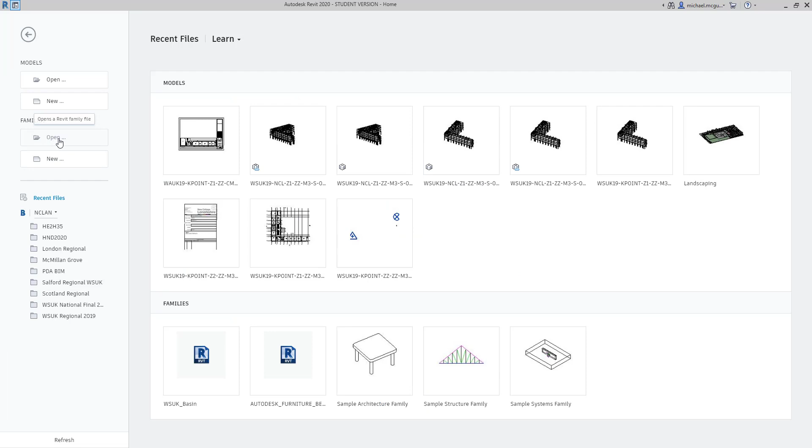If we look at the instructions, add the components below and then edit those families. Either way, whether we edit them or add them in first, doesn't really make much difference, but the task here is really just how to edit them. So within Revit, if we look at the families section and say open, I know I need to go to downloads, so we'll start off with the wall mounted family that's there and just say open to that.

So what we're being asked to do is edit the family so that its location will be calculated in the room. So if we look at the reference level within floor plans, if we go to reference level view, and we can scroll down.

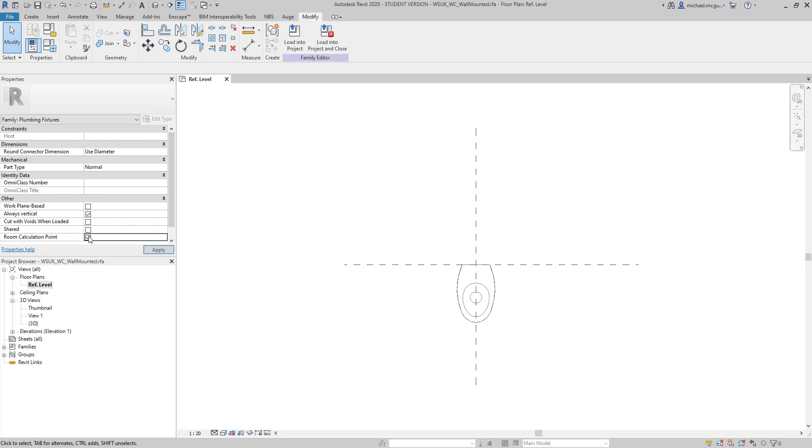If we click in the view itself, we've got room calculation point. So we switch that on and we'll see the symbol of where the family is going to be counted whenever we schedule, which room is this likely to be in. Wherever this little marker sits, it's going to use that room.

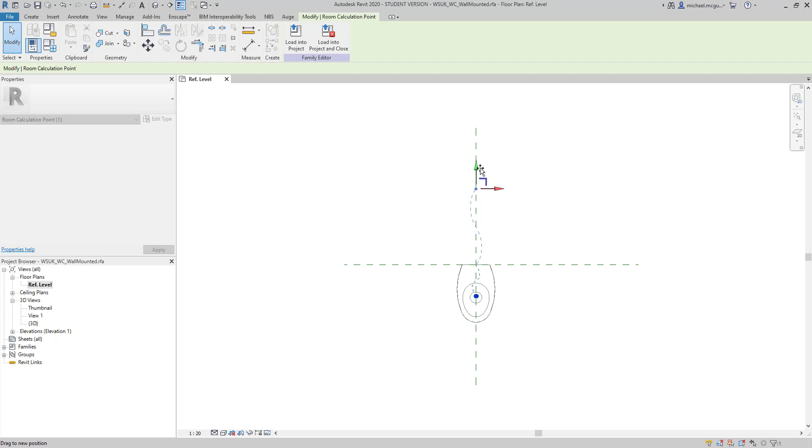So if I use tab a little and just bring that into here, then it's definitely part of the family, which is sitting in the room that it should be calculated in. And if it were to sit up here, for example, and there's a wall here, and behind this space, say this is a room and it is a bathroom, behind that there's maybe a chase for the vertical pipes or something, or a different room, then it would be calculated as part of that room.

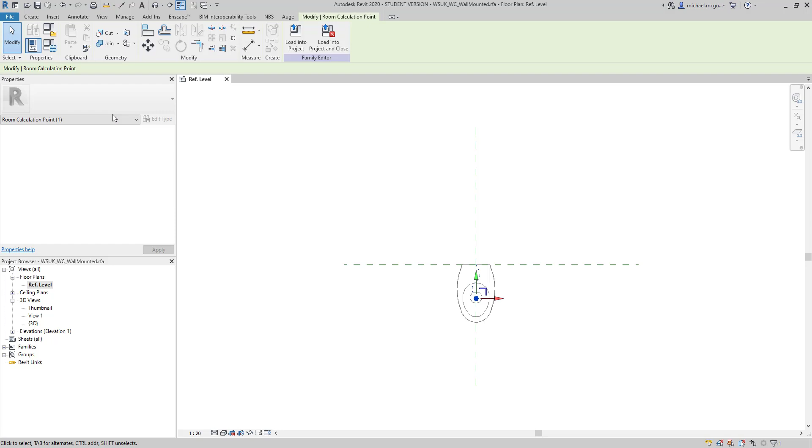So let's move that to here, and then I want to go and just save the family itself. So file, save as, and we've got the option for family, and then go and save that to wherever you need it to be. Now if we're being asked to rename at any point, then we can go in and rename it, looking at the BIM execution plan, but we're not being asked to rename it for this example. So we can just save over the top of that, and it's the most recent version.

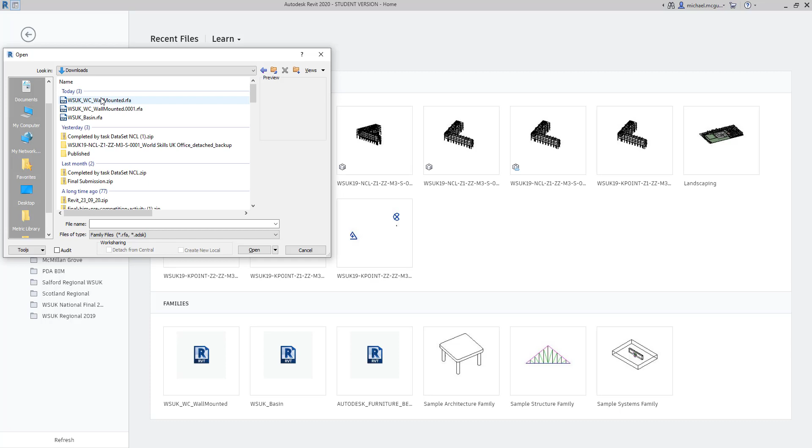So let's have a look at the other family. We'll say open again for families, and again I'll go down to my user. It's in downloads. And this time we'll go to basin.

Once I open up the basin again, looking at reference level, this time the room calculation point is switched on, but what you'll notice is the room calculation point is all the way down here. So if you don't do this task and simply insert this family, once you do all your scheduling, you'll find that this basin won't be counted in this room. It's actually going to be counted in whatever room is down here.

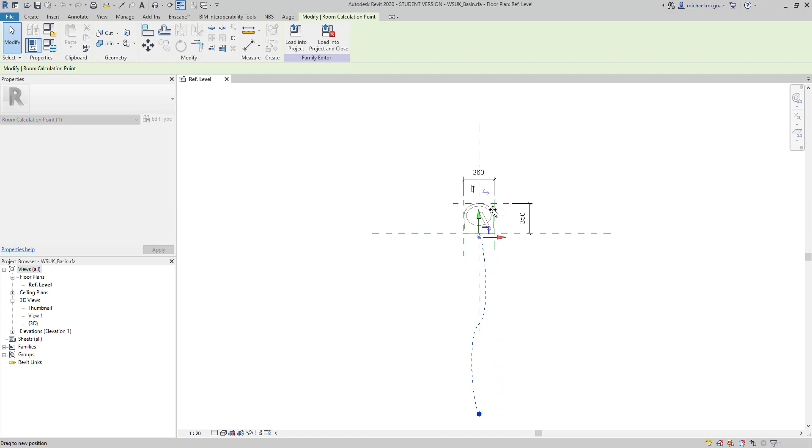So again, all we need to do is move the little symbol into the family itself and then go and save it. So save as family, and again I'm just going to update and keep that name. I've not been asked to rename it or anything, and that's it, saved.

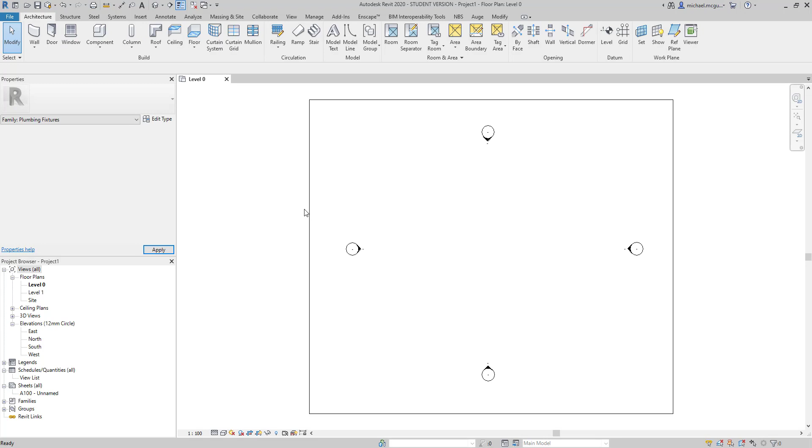So what that means is whenever we've got a new project, we open up a project and I'll just draw in a hosting element. So we'll say wall if those components are loaded in. So we can go to components, load components. I'll go back to downloads and we can go and load in both of them.

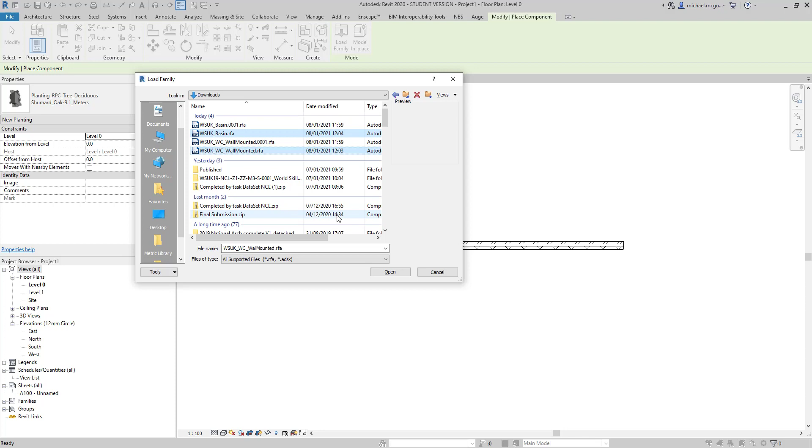So we've got these two here. The others are the journals or the backup files. We'll load them in. There we go. So there's basin. Let's hit space and just bring that in. I know that it would be counted now in this room if there was actually a room there. And we'll go with this wall mounted as well.